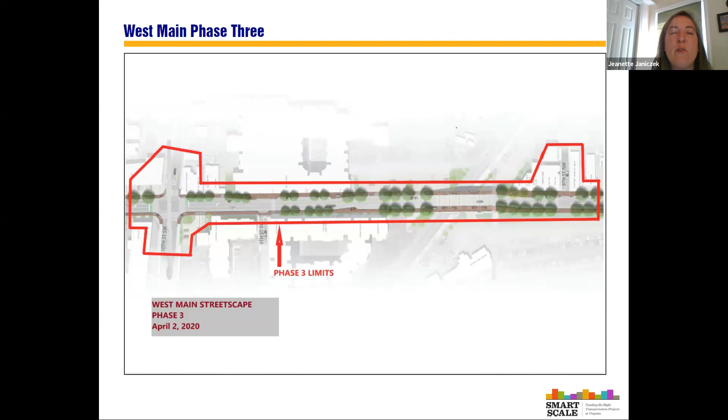And with that, I'll turn it over to Jeanette Janiczek, UCI Program Manager with the City of Charlottesville. All right, thank you. Good evening. So all of our projects, the 4 that we have submitted applications for, have a heavy emphasis on multimodal improvements, and you'll notice that throughout the presentation.

So the first project that we have to discuss is West Main Phase 3. Phase 1 and Phase 2 of West Main have previously been funded through Smart Scale and revenue sharing grant applications. The third phase is located between 8th Street and Roosevelt Brown Boulevard / 10th Street Northwest.

We're going to continue the improvements, which are proposed as removing some on-street parking to reallocate that to pedestrian and bicycle facilities. We're going to improve bus shelters along this corridor. Pedestrian crossings will be improved with bump outs and meet the latest ADA requirements. We're also focusing on the aesthetics and safety of the corridor, ensuring that we're designing for the human scale to make the pedestrian and bicyclist experience improved.

So we'll be looking at adding different types of street furniture, adding interpretive signage, enhancing landscaping, using different treatments of the pavement to break that up and to delineate this is a pedestrian facility. We're also looking at replacing the signal at Roosevelt Brown Boulevard as well.

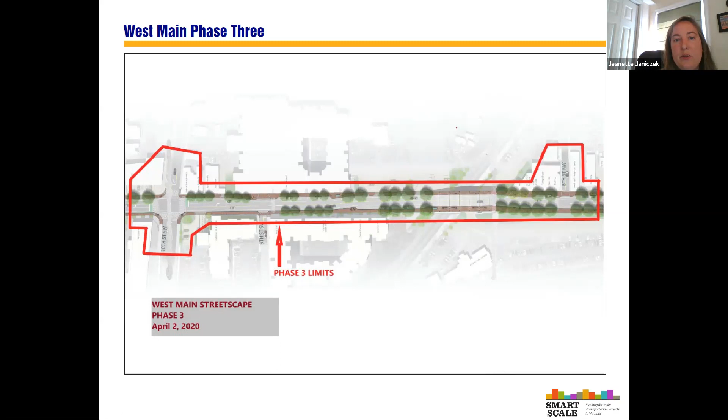If you go to the next slide, you'll see that we're focusing on the safety, pedestrian access, and bicycle access, and we're currently estimating the project to be $7.9 million.

Are there any questions or comments? Really questions, hopefully.

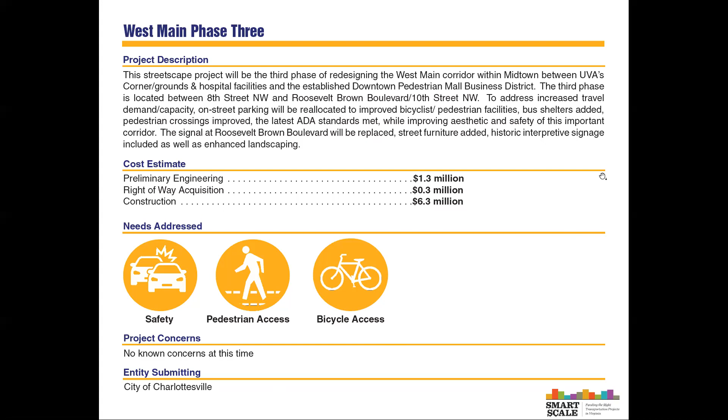Hey, thanks for doing this, and thanks for stopping by tonight, Jeanette. I'm wondering if broadly in any of the West Main suite of projects, if you've considered doing any tactical urbanism to allow people to see on the ground what you're talking about doing on paper. Thank you. Yes, no, we haven't done any demonstration projects for this. We are planning a public hearing so that we can discuss certainly phase 1 and phase 2.

So we also have some questions in the Q&A box.

Nancy O'Brien is asking, what kind of trees are you planting? We are planting a selection of red maple, American hornbeam, Kentucky coffee tree, sweet gum, black gum, London plane tree, swamp white oak, willow oak, and American elm.

Peter Ohms is asking, what are the extents of funding status on the previous West Main Street phases? We've received funding for both phase 1 and phase 2, so we're considering that fully funded. We are going to go through a value engineering process as well for the whole corridor to ensure that we're constructing it appropriately.

And Beth Cohn is asking, with the reallocation of parking, will additional parking facilities be provided?

No, that has been explored through our economic development department. They're looking at possibly creating agreements where there's shared parking with private facilities. There has been discussion of looking at the Amtrak parking lot. They're looking at garages, but nothing's been funded and nothing has been identified as a possible project.

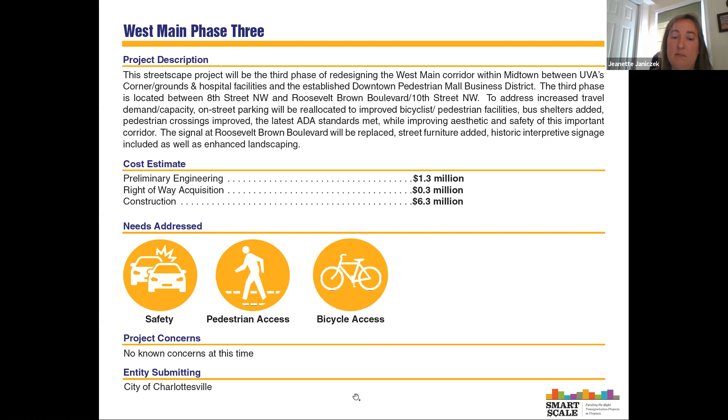What we're considering doing, though we have not fully vetted this, is taking away the on-street parking during construction and phasing it, moving construction from side to side so we can still maintain access to all the businesses. We understand that's imperative, that there's no way we could simply close one side of the street for a month or even a day. So that's something we'll ensure is maintained, access to businesses and for the public walking through the corridor.

Great, so I think we're ready to move on to the next project, Preston Ave and Grady Ave.

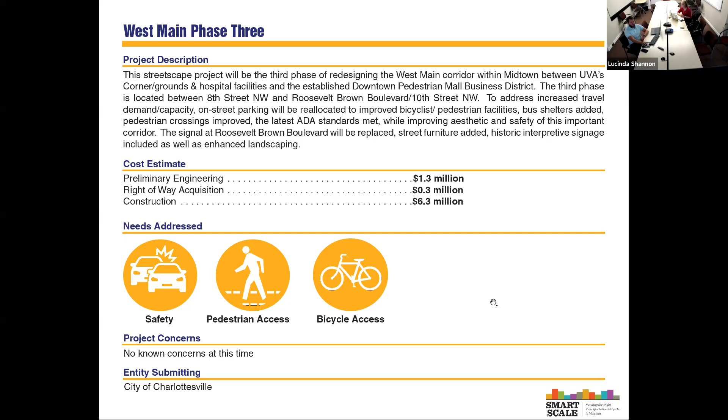Okay, wonderful. This is another streetscape project, reconsidering the unusual intersection of Preston Avenue, Grady Avenue, and 10th Street. The current concept we're considering is essentially shifting Preston Avenue further south so that it lies with 10th Street, and creating what amounts to a driveway or small road to serve the businesses.

Which would be the C'ville Coffee and Martin's Hardware. What we're trying to do here is simplify it to one signal, which would be at 10th and Preston now to the south. It would allow for enhanced pedestrian access, so there's less crossings, and it would also simplify it for bicyclists.

So 10th Street would be improved to handle those right turns, as people coming from the downtown mall area would now need to take a right to get back onto Preston.

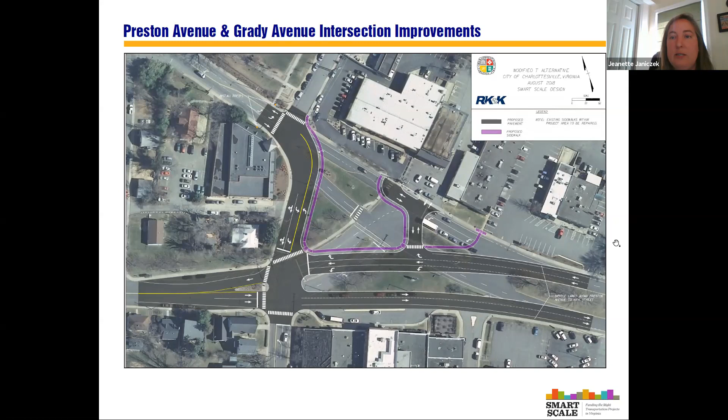New green space is certainly going to be added. Again, this is conceptual, we're just showing that we're ensuring access. This could be reimagined to a degree. We are currently estimating this project to be 6.1 million, and again, we're addressing safety, pedestrian access, and bicycle access.

Okay, so we have a few questions. The first question is from Nancy O'Brien. She's asking, while construction is ongoing, how will you protect parking in the adjacent neighborhoods?

So this is a very conceptual project. I'm assuming that you're talking about—we would not be taking away parking within the neighborhood or the residences. We would certainly be maintaining access during construction. We have a permit process that would allow for protecting neighborhood individuals parking on their street during certain times. That's about all I have to say about that right now.

Okay, we'll consider that in the future.

The next question is from Valerie Long, and she's asking about Preston, Grady—other concept plans for this area have been shared with the city that many of the area neighborhoods feel are much better. Why was this plan, which seems more impactful, pursued instead of these other plans?

Well, I guess I would ask which ideas or concepts are we talking about—the ones that Place has considered, or it would be helpful to know what other options. I know we have Kyle on the line, who's also the project manager, if you wanted to answer this question.

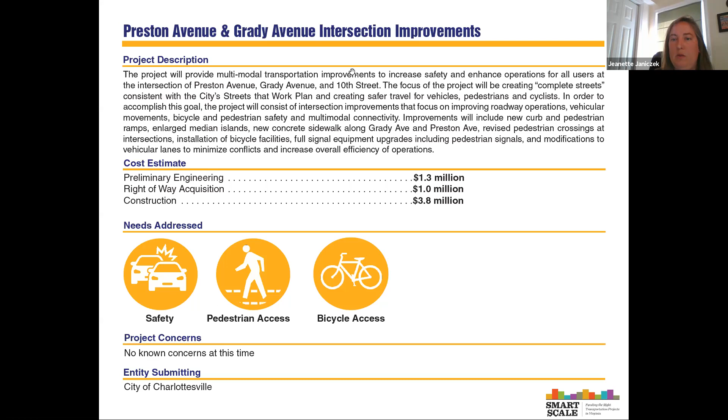I think there are several different aspects we were looking at when we put this concept together: how the intersection functions operationally, bike and pedestrian features, and access management. Each of the concepts we evaluated favored those components a little differently. I think the one we settled on was the best approach for those three components holistically, and that's our thought process for why that concept design was chosen and why we intend to move forward with it.

A follow-up question from Valerie Long: would you be willing to start with a community engagement process first before taking this project further? I think we fully intend to have more community engagement on the project, though I don't foresee the concept design changing drastically. We don't intend to reevaluate our options completely, but yes, there will be aspects of this open to the public going forward.

Chris Henry is asking if a traffic study has been conducted on this intersection. Yeah, we have a study from the last round of Smart Scale conducted back in 2018. We haven't completed a study since then, but one has been done in the past two to three years.

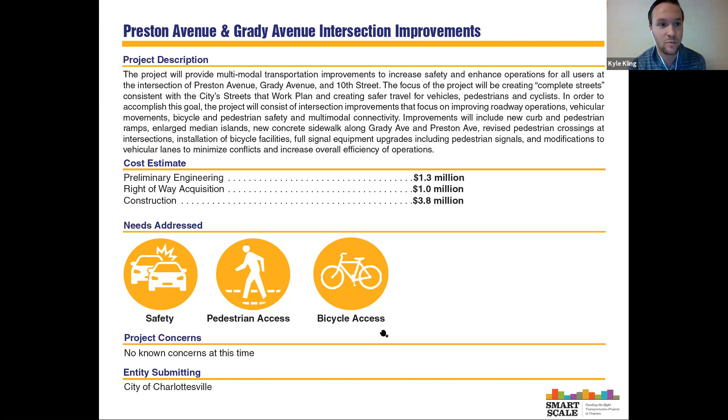So, a pretty substantial amount of time before you would actually see boots on the ground starting construction on any of these projects.

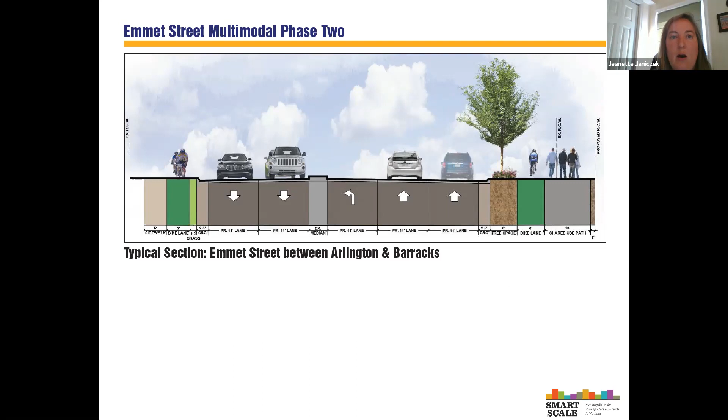The estimated cost is $4.5 million for this project, and again we're improving safety, pedestrian access, and bicycle access. We'll open it up to questions.

I don't see any questions. Wait... did we get one? Yeah, we did. Okay.

Nancy O'Brien is asking: are there any trees along East Emmet, or just Emmet? It was—are we maintaining the trees within the median, might be the question.

That's within the public right of way; other landscaping would likely be privately owned. So we have Amanda Ponce, the project manager for this one—are we disturbing the median, Amanda? There are no trees in the median that I'm aware of currently. We would be adding some streetscaping features in that 6-foot planted buffer we're proposing, but no.

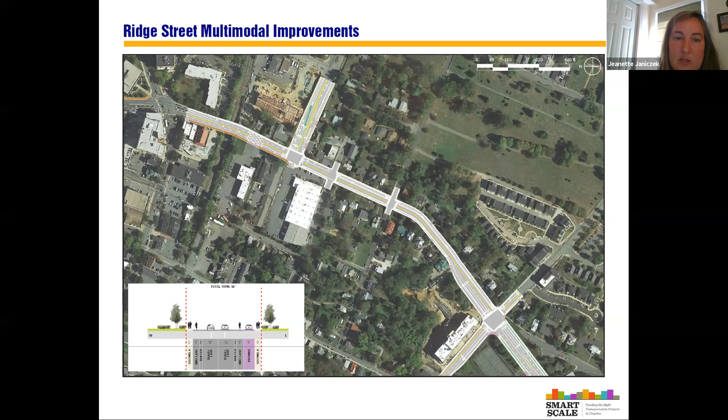This comes from a study on the McIntire Ridge 5th Street corridor. It reallocates pavement from on-street parking to improve multimodal access and safety. The drawing shows 5-foot wide on-road bike lanes with a 2-foot buffer between Dice and Cherry Elliott Avenue. There's also a concept of possibly having a shared use path on one side. We're also proposing curb extensions on the east side of the intersections with Oak Street and Dice Street to improve pedestrian crossings. The project is estimated at $5 million, and again, we're improving safety, pedestrian access, and bicycle access.

We have a question from Rory: is the buffer solely protected by paint? At this time, yes, we're proposing paint.

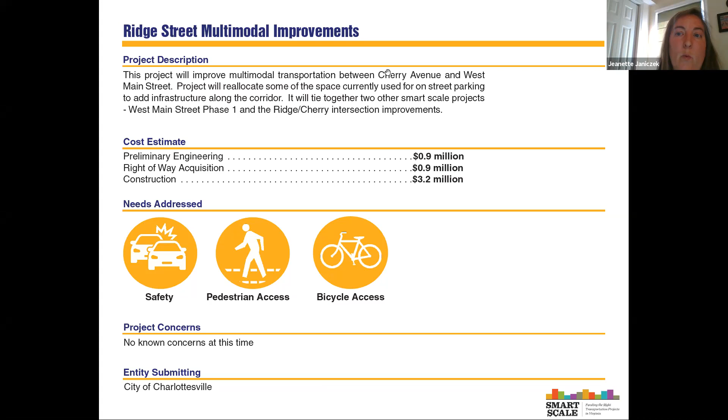The next question is from Peter Olms: you mentioned the possibility of a shared use path on Ridge—is it the case that the bike lanes would go away in that option? That I'm not sure of, if Brennan is on. The shared use path is shown mainly from Monticello north, but in the actual EPR study that was done, in order to accomplish that we'd have to build a parallel bridge over the railroad tracks. So that's more than likely not going to be in the application at this point. We're not anticipating a shared use path between Monticello and Cherry as part of this application at this time.

The next question is from Kent Sushel: is there parking on the street? The parking would be removed on the west side but would remain on the east side of the street. As part of the study, we had EPR look at access to all the residences along that area, and all of them on the west side either have a driveway, parking behind, or are on the corner and can park on the side street. So no one in this scenario loses access to their homes, but removing parking on the west side was the only way to have enough room to fit in the bicycle facilities.

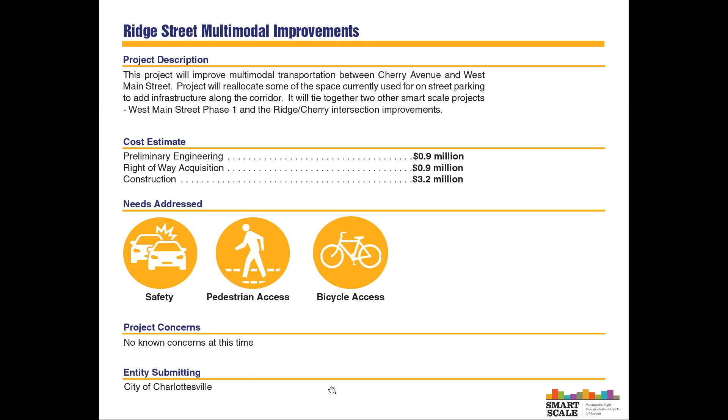Peter Krebs notes that the east side parking is going to be important because of the early learning center there. And that's not going away.

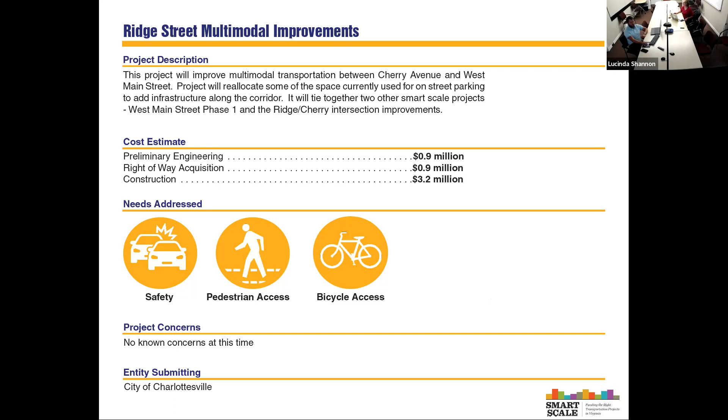All right, thanks. So we're going to move on to Albemarle County's projects, and we have Kevin McDermott and Daniel Butch. Kevin, go ahead.

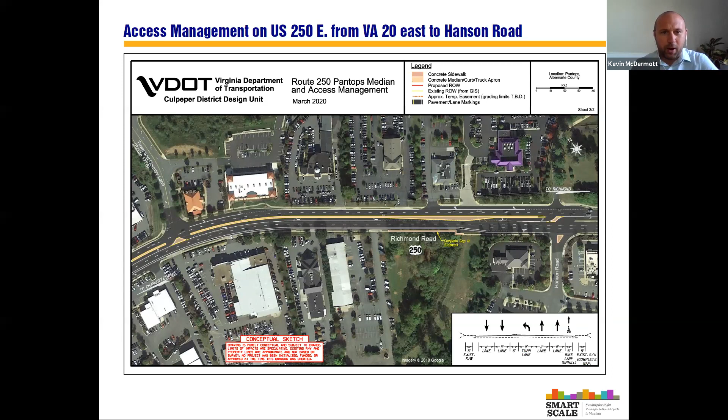We think this will really improve the flow of traffic through this corridor and also address the safety problems. It was identified in the most recent PANTOPS plan as one of our high priority projects. This shows the issues it will address: primarily safety, pedestrian access, and congestion. This was one of the higher ranked corridors for safety problems in Albemarle County. That's pretty much the description of this project. I'm happy to take any comments or questions.

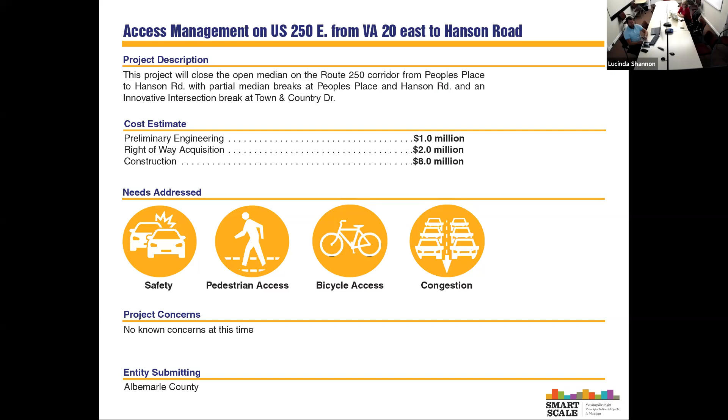Thanks, Kevin. Our first question is from Neil Williamson: Is there a transportation solution for unloading new vehicles? This work is currently done in the center median lane. Yes, actually we've started trying to address that already because we don't think the center lane is an appropriate place for the unloading of those vehicles to occur.

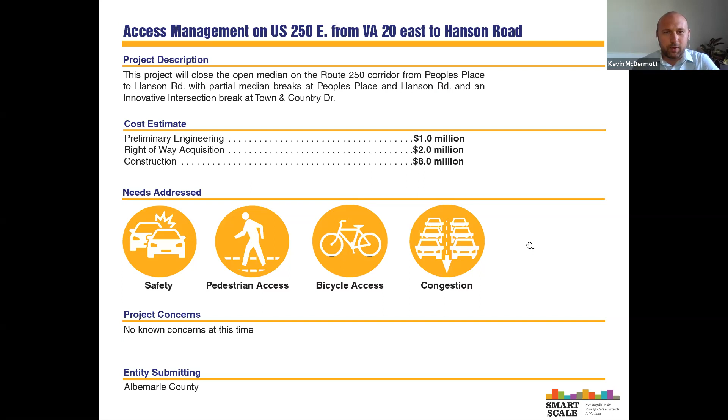What Mr. Williamson's referring to is all the dealerships there. When they get new stocks of cars, the trucks come in and often park in that median. So on two of the roads perpendicular to 250 - I think it's Town and Country, and Peoples Place - we've designated a stretch of parking along both of those places for the unloading of vehicles. We've started doing some outreach to these dealerships, asking them to start directing their deliveries to those places.

The next question is from Bruce Dotson: Given the level of funding available in the district and statewide, how realistic is it that any of these projects will be funded? Is there a local priority? Yes, there is a local priority. You can actually review a priority process document on the county website. It's under the Community Development Department Transportation page, and every other year we rank all the projects recommended through various plans to come up with the ones we see as highest priority.

The work we do is focused on a similar process to how Smart Scale is done. So we look at the same types of factors such as land use, safety, congestion, accessibility, and we rank all our projects. This 250 project was ranked the third most important project in the district, in Albemarle County, during the previous update to that process, with the number one being Hydraulic, which we talked about yesterday.

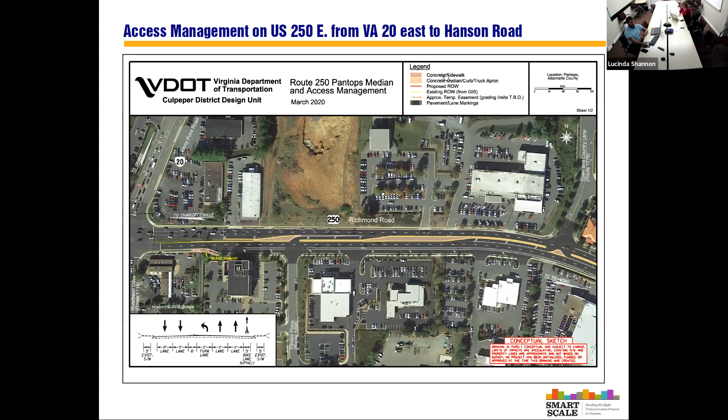That is in the current VDOT six-year plan, but still a few years out. I had previously heard that it may be advanced a little bit, but I think we're still two or three years out on construction from last I heard. We'll know more once the state releases their updated six-year plan in the next couple months.

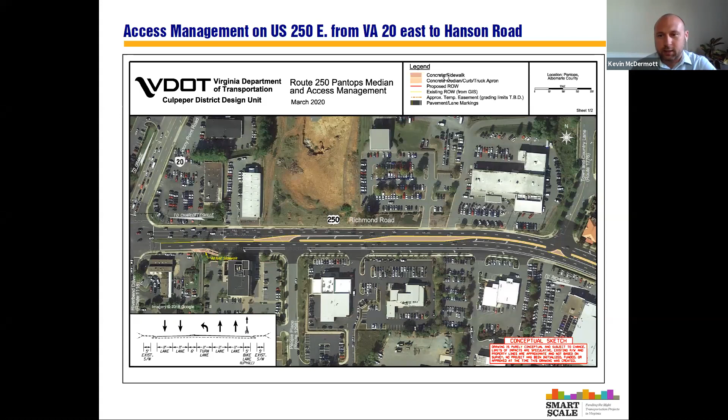Okay, thanks. Do you want to move on to the next project, Kevin? Sure. So this project, the John Warner Parkway and Rio Road intersection improvements — I'll start by saying that this project and the next one I'll discuss, the Rio Road Belvedere R-cut, may be able to be viewed as a single project.

As you know, we only have 4 slots to submit applications, but we're presenting on 5 projects tonight. These two, the John Warner Parkway and Belvedere intersections, are still being evaluated, and likely they would either be combined or we may break them out and do one or the other. We don't have enough room in our applications to do all of them, so one of these two is going to change.

But the reason we're looking at the roundabout is mostly because we know this intersection has problems currently. They were identified through a lot of our ongoing development reviews in the area, including the one on the southwest or southeast corner of this intersection on the old Wetzel property. We identified that this intersection has a lot of failing movements currently, and in the future will begin failing overall. It's also got a high accident rate — around 8 or 9 accidents a year on average over the past 5 years.

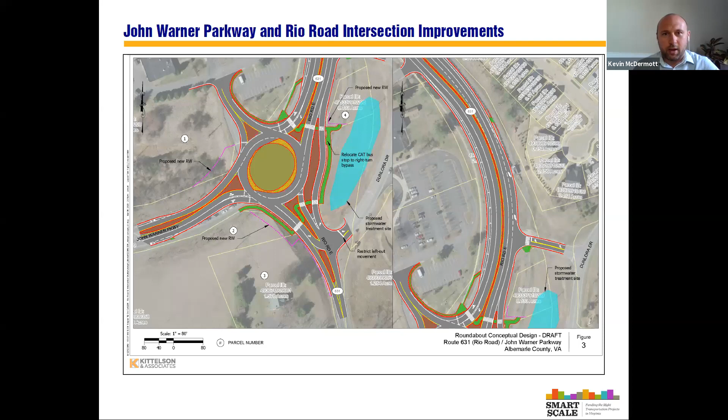We'd be able to take advantage of some publicly owned right-of-way, such as in that island between Dunlora Drive, to reduce the costs of the project overall. You can also see that we would continue that current shared use path that goes through this area of the intersection. You can move on to the next slide.

And I'm happy to take questions or concerns. So they've been coming in, and I think Paul Jonesy has a question for Amanda, so maybe Amanda can type in there and answer that about the Emmett Street project. The next question is from Patrick Punch.

The 2 projects on Rio Road are very close to each other — why aren't they considered as just one project? Yeah, that's what I was discussing, that we may look to combine those. The thought was that when we talk about the R-cut coming up, you'll notice that the best way to address one of the movements in the R-cut would be to send them to something like this roundabout. So they may be combined into one project if we think that's the best way to go, and that it gives it value that would score well in the process.

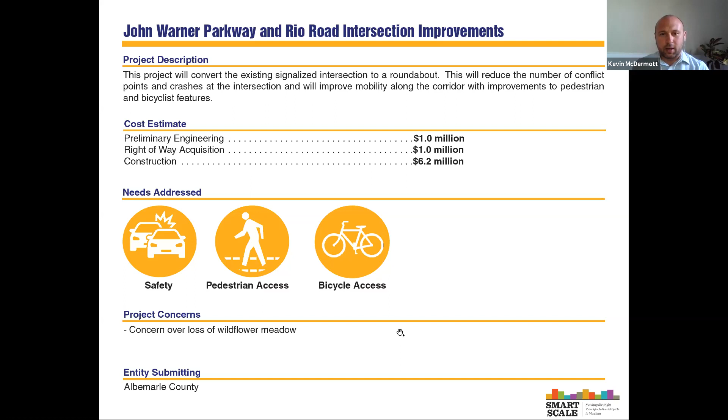And the last question, Martin Meth is asking if the traffic study that Kevin mentioned, the one referenced for the roundabout, is available for the public. I'm not sure if it's available right now, but we can make it available. When these are submitted, they do become part of the public record, and the full traffic study is there. I'm happy to provide that if it's not out there right now. And I will also say, if this is the last question we're going to take, please send in your comments, and if there's additional questions or additional information I can get you, then I'm happy to do that offline. Yeah, there's quite a few questions. I was just going to move on to the next project, and we can try to come back to the ones, or we can answer them offline.

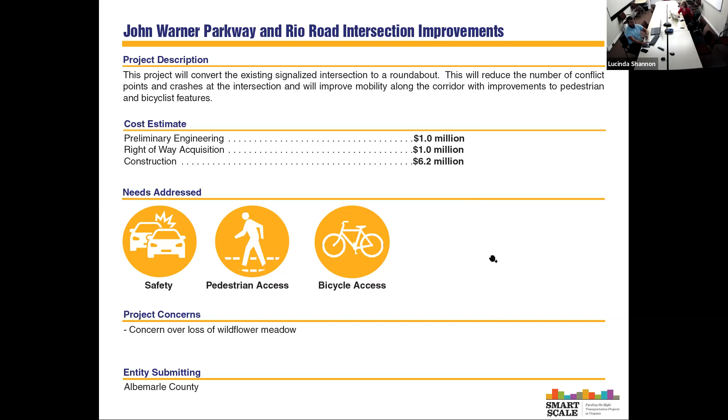So do you want to go on to the next one, Kevin? Yes, please. So what we're looking at here is, like we said, just down the road from the previous project at the Belvedere intersection with Rio Road. As Belvedere has continued to develop, and the center at Belvedere, which is going to be opening very soon, right at this intersection, have continued to move forward, we recognize the need to address that traffic that is coming out of Belvedere trying to get on Rio, primarily trying to make the left, and evaluating the potential options for that.

We determined that it looks like the R-cut process, or the R-cut design, would be the best option for that.

So what you can see here is an R-cut. As we discussed a little bit in our presentation yesterday, what that would do is remove the possibility of left turns coming out of Belvedere onto Rio, and push all of those movements to a right turn. Then you'd go up across the railroad bridge to the end of that median near Greenbrier Trace, and make a U-turn there, then come back.

So no more left turns coming out of Belvedere or out of the church parking lot across the way. All those movements would be done by making a right, going down a little ways, then making a U-turn. In the case of coming out of the church, that would possibly go to the roundabout we discussed. You can see there is a pedestrian crossing included there. These work fairly well with R-cuts because you only have to cross one direction of traffic at a time, and there's a median you're able to get into.

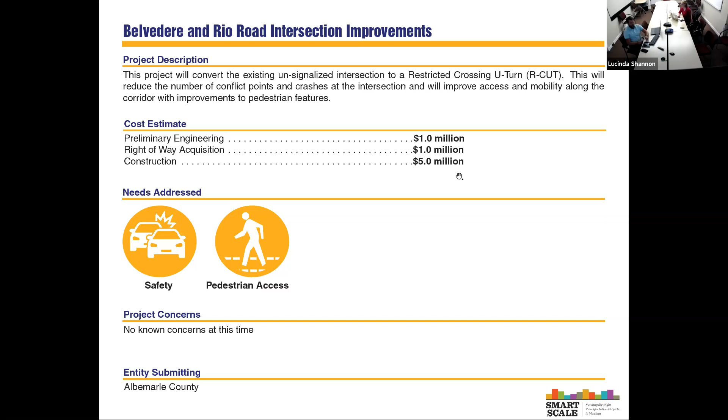Can you go back one on this, Nick, so we can look? I'm not sure - the other way. It doesn't look like the initial designs show any signalization. I'm sure anytime we put these in, R-cuts can be signalized at the left turns or at the U-turns. So it's possible we will continue to evaluate that. Maybe Chuck Proctor from VDOT could weigh in, if that's something they are still looking at. I know he's on the line. For this project, I don't think we were looking at signalization initially. It can be evaluated and added later if it's warranted.

Okay, thanks, Chuck.

Okay, the next question is from Peter Thompson. What does CAT think about this design, i.e. their ability to get in and out of Belvedere as they have promised to do for many years? And I thought there would be a signal at Greenbrier Terrace to allow safer U-turns.

Yeah, once again, we've got this so that it can accommodate a 40-foot bus. We will discuss that with CAT to see if that's ideal for them, if they can do that. And we will continue to evaluate it to see if a signal would be necessary. The next question is from Patrick Punch: Why is an R-cut better than a traffic light?

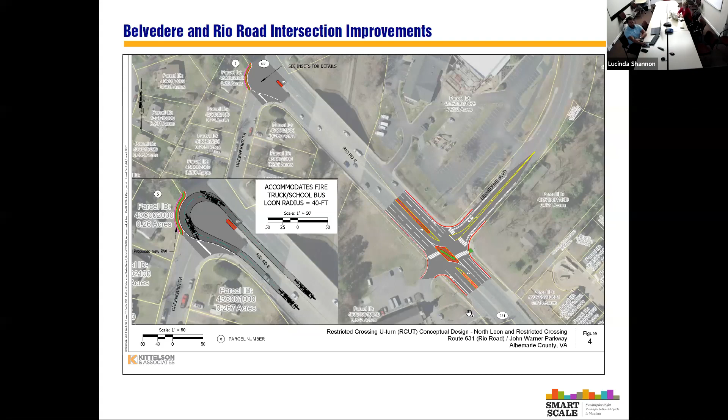All right, next project in Albemarle County, we have the intersection of Old Lynchburg Road and 5th Street Extended. There's currently a study going on. The 5th Street corridor study is underway and expected to be complete in spring or summer of 2020. It's possible to be highly recommended for a roundabout at this intersection. We've heard a lot about sight distance issues coming from Old Lynchburg, turning left onto 5th Street Extended. This would address that. This application also includes improvements to bicycle and pedestrian at-grade crossings, as well as transit features to the existing bus stop adjacent to this project site.

The study, which is currently still underway, would evaluate whether this would be a single or double lane roundabout. The Albemarle County Comprehensive Plan does identify transit improvements needed in this corridor.

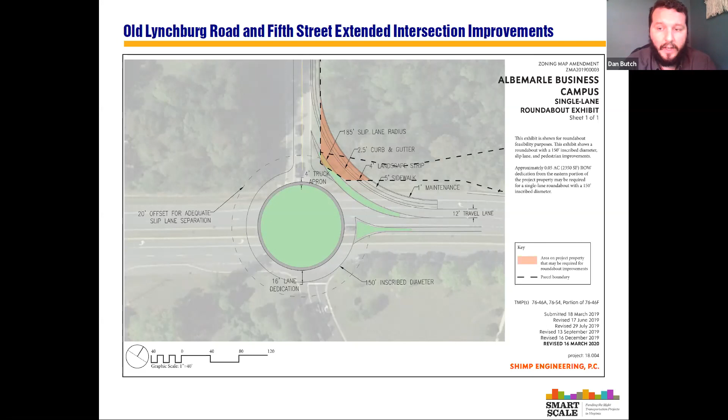Some additional background: ongoing development in this area with Royal Fern, known as Albemarle Business Campus, as well as Southwood, both have assessed this intersection, which showed the expected level of service analysis to fail. But in the TIA, a roundabout would address the problems revealed.

Additionally, the Albemarle Business Campus application has not been approved, so we don't know of any proffer money that would be applied to this project until it is approved. But in this case, prior to that, the county is looking to possibly contribute local funding towards this application. And if it is approved in Smart Scale, we can always work with the developer to reimburse or contribute future funds towards the project.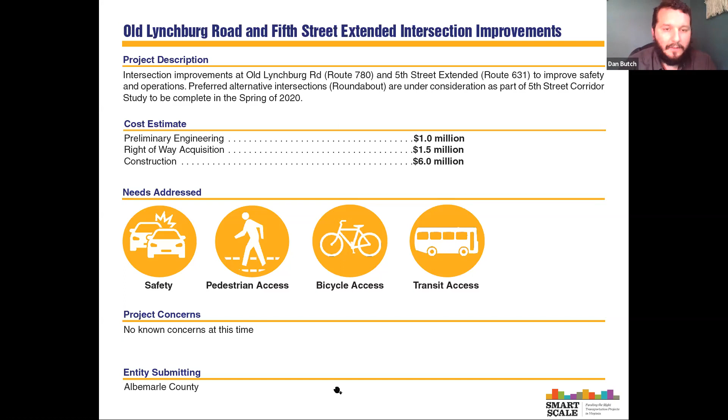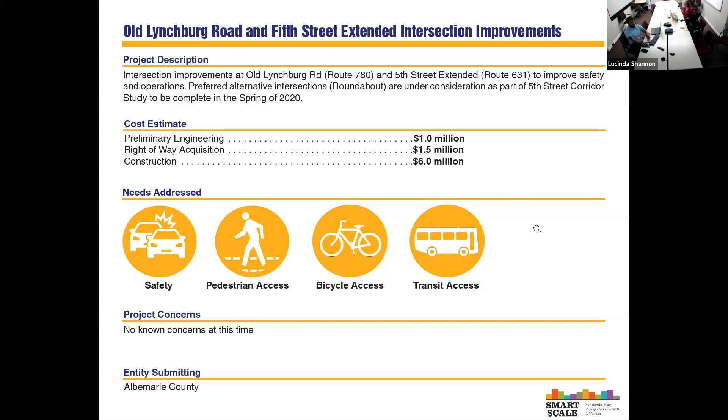This was also submitted in the last round of Smart Scale, but it was not funded. The recommended roundabout would have minimal right-of-way impacts and the largest crash reduction, reducing the number of conflict points and crashes by an expected 82% as well. This intersection is also called out in the southern and western master plans for bike, ped, and operations improvements.

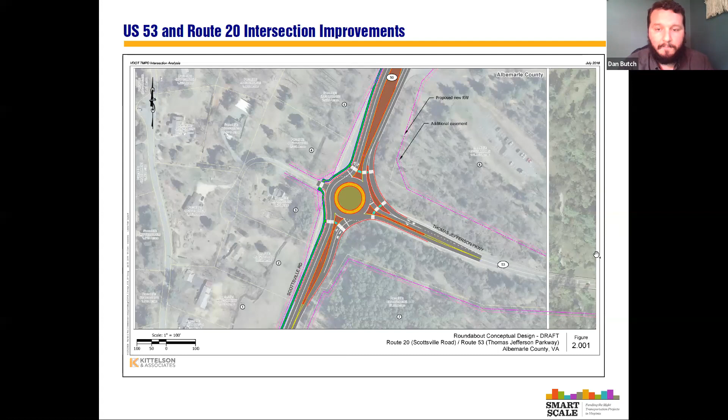And again, on the next slide, you'll see its total cost estimate is $7.5 million. From some history, 2014 to 2018, there were 35 crashes within a 300-foot buffer of the intersection of 20 and 53.

Okay, our first question is from Paul Josie.

Per the concept design report, topography and existing utilities were not considered, yet by adding 6-inch curbs and removing drainage from the center of the median to the curbs, likely all of the existing memorial trees to military casualties would be removed. If memorial trees are likely to be removed as currently shown, is it possible for another study to be developed to relocate this path along one or both sides of Route 20 where adequate right-of-way exists?

I think this topic is related to the 20 South shared use path project mentioned yesterday. I'm not sure about the tree impact in this area. I don't know if Kevin or Chuck have some more background on that.

Yeah, for this one, there's actually been a revision to the plan. For most of the trail through this section, it's been moved to the east side because of the creek that runs along the west side of Route 20 from the Piedmont intersection southward. At the roundabout, we're crossing it over on the south side. It would start at the Saunders entrance to the Saunders trailhead and head south along the east side of Route 20, then basically turn up Route 53 for a short distance and then drop off as a connection for cyclists coming down 53.

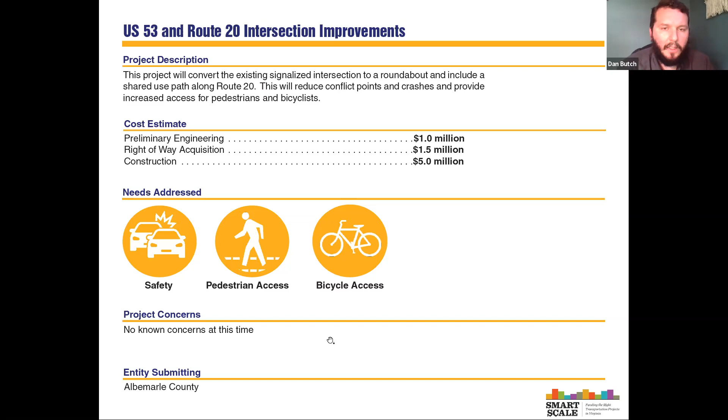I'm not sure which path is referenced from yesterday. There's Route 20, there's a shared use path planned down the median strip. I think Chuck just addressed that, yeah.

Chuck: Yeah, I can take this one. The trail in the median on Route 20 ends at the intersection with Saunders Trailhead and the entrance to PVCC. South of there, the trail would jump to the outside of the road. The reason for the trail north of there to be in the median was mainly because of the conflicts at the ramp interchanges, and there's no way to safely cross those ramps for a pedestrian and bicyclist facility without putting those folks at risk of getting hit by fast-moving cars on those ramps coming on and off the interstate.

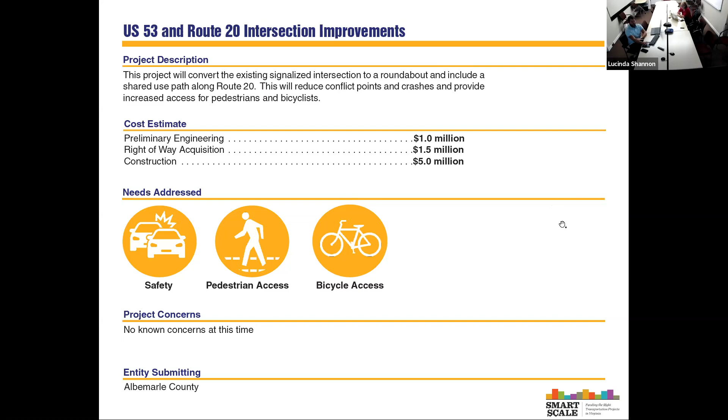I see Kevin furiously typing.